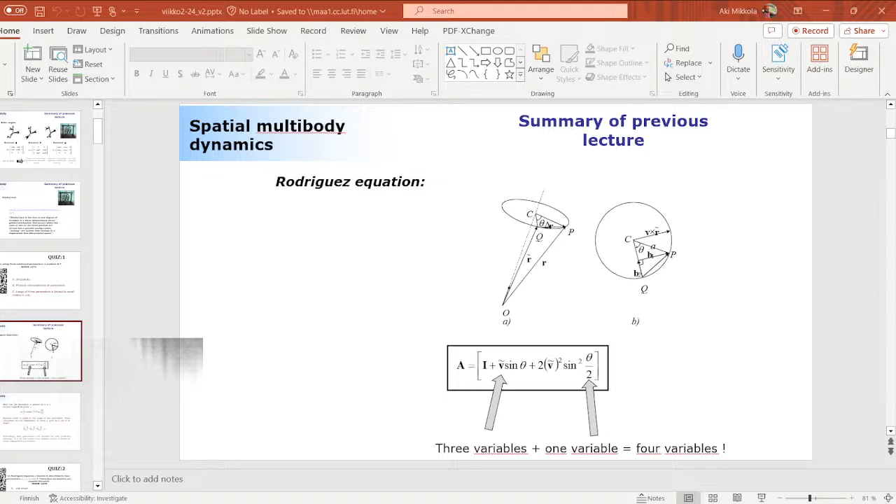How come? Maybe I capture the wrong thing, because I'm capturing this one. Should I capture window instead? Maybe capture the whole screen. Yeah, display like this. This will be a safe choice, I think. Okay, so now I still need to do this. By the way, how do other teachers do it when they're streaming? They don't use YouTube. The other one, the machine dynamics, it works fine. He just plugs it in.

This is Greg's course, is it? Greg's, machine dynamics. I'm really bad at names. You can ask him. He has a similar laptop as you have, and he just plugs in. Is he streaming via YouTube or something else? I believe he's just recording. I think he's also streaming, but I'm not sure. He's probably streaming via Teams or Zoom, which probably makes a lot of things easier. Yeah, of course. But I don't want to use Teams. It should, in theory, still be similar because you're still just streaming. Right. Yeah, but I don't want to use it because there is a reason for that.

It shouldn't be. But YouTube is always a bit more complicated. There are so many moving components, so sometimes it is a little bit painful. So let me take a look at the YouTube channel, how it looks at the moment. It would be nice if I could use another computer to see if there are any comments from online participants. It's just so many moving components. Simulation laboratory course. Okay.

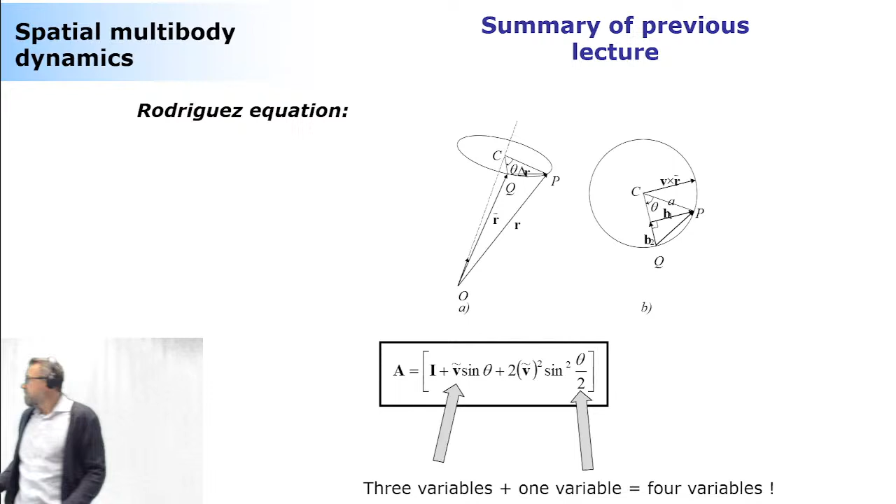And the constraint is coming from the fact that the vector v is unit in length. So when you compute the length of the vector v, that must be 1. And that's the constraint. So 4 parameters, but they have 3 degrees of freedom because of 1 constraint. And that's how it works. So when I compute the length of my vector v, it must be 1.

That's my constraint. This, by the way, is a funny thing, because when we made our first in-house code in multi-body system dynamics, at the very beginning we used Euler angles, and then after a while we started to use Euler parameters. And with Euler parameters, the one thing we forgot to do was to use this constraint. And it was a really weird simulation, because even the simple pendulum, a rigid body, was getting bigger and smaller, and we were like, what is this? Did we invent a new kind of dynamics?

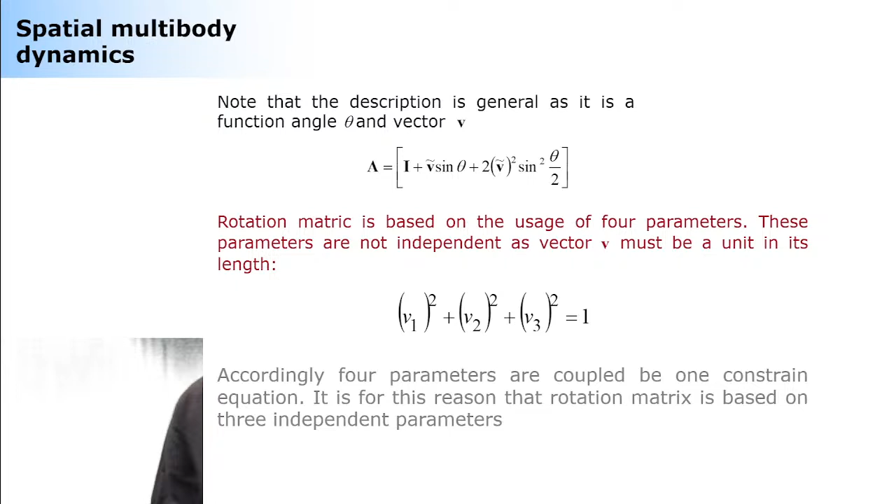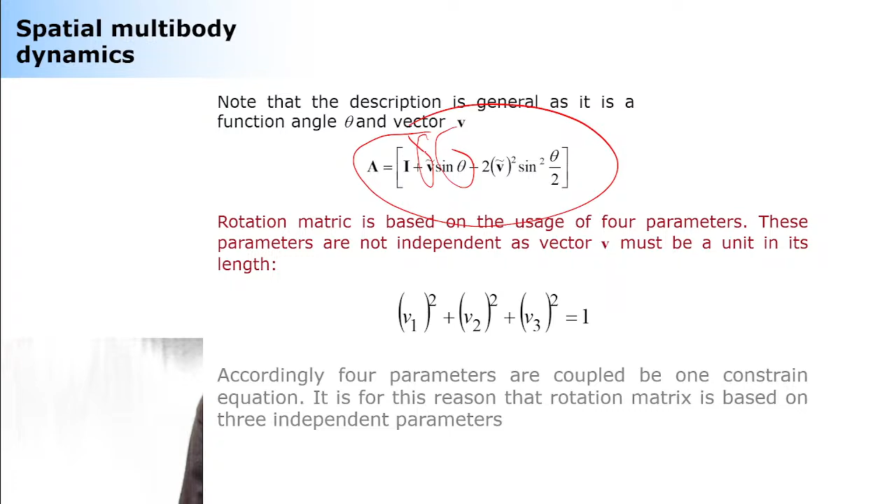No, we did not. But we forgot that there is this constraint. So the constraint needs to be added to the list of constraints. Otherwise, it's not going to work. It's not going to be possible to do any kind of computing. Okay, so here's the one that is up in my slide. This is your rotation matrix. And you know that it is now a function of vector v, expressed in skew symmetric form, and then the angle theta. That's my parameters, and then there's a fourth parameter.

Now, in the Rodriguez equation, rotation is described by 4 parameters, v1, v2, v3, and angle theta. These 4 parameters are coupled because: angle is small; the vector v is unit in length; we are assuming a body to be rigid; parameters are not coupled because a body can rotate in 4 different ways. Only one is correct. Okay, this is not as easy as what we started with in the beginning. So what do you think about the first success rate? Is it going to be 100%?

That's 100%. That's 100%. This one here is not going to be 100%, but it's going to be something quite high. I'm thinking like 85, 95, that neighborhood roughly. Still 90. Okay, so that's what you're thinking. So let's take a look.

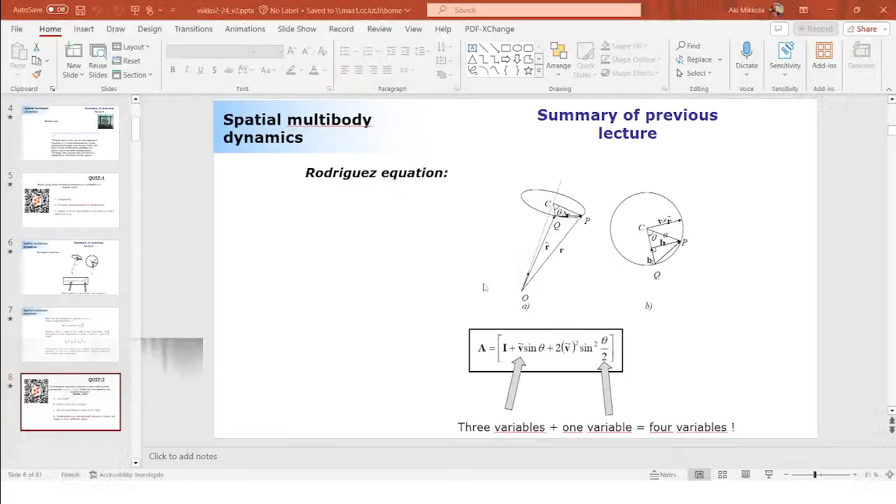Okay, you guys ready? Did you enter your answer already? Oh yeah, you cannot yet because I first need to show you this one here. This one? All right. No, if you go out of this presentation, it stops completely. Hold on. Why is that, because I thought that my in-class quiz is on. No, if you turn around, this presentation. Hold on. Okay, here. Yeah, sorry. You don't see this. Okay.

This is it. So we got 18 answers, which is, I think, a good number. But what's the success rate? Is it going to be 100? 95. No, don't say that. But I think it is going to be 100. I think it is 100. So we got more answers. And now this is never a good sign.

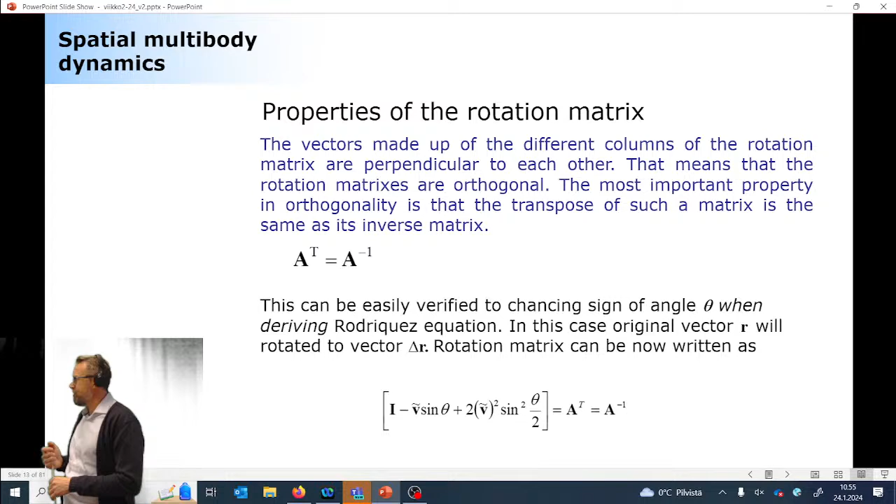Okay, properties of the rotation matrix. This is no surprise to us. They are orthogonal, and if you build the vectors out of the columns of the rotation matrix, they're unit in length. Orthogonal is a beautiful feature because then the transpose is equal to the matrix inverse. It means that you're changing the mapping order. Conventional is from the body reference coordinate system to the global coordinate system, but if you need to do it the other way around, from global to body, you do the transpose. That will change the order you do the mapping. And you can test it by doing the mathematical exercise at the very bottom of my slide. So that's how it works.

All right. You cannot change the order of rotation. That's very important in three-dimensional space. You can make an experiment yourself. You can say, okay, Euler angles, my first rotation is going to be 90 degrees, and the second rotation is 90 degrees. Then you change the order, and you will recognize that your body will have a different final configuration. So you cannot change the order of rotation. In the planar case, that makes no difference, because we only have one axis where the rotation can take place. But in three-dimensional space, you cannot change it, and that's something good to keep in mind.

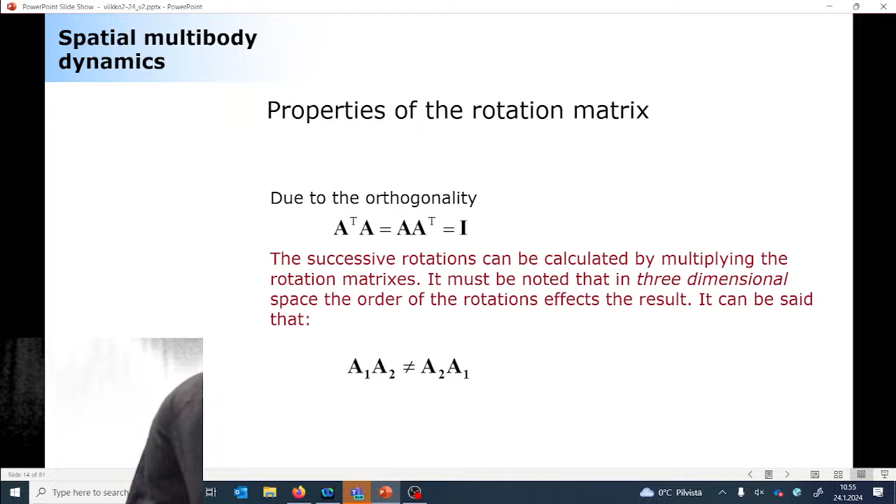Robot kinematics. This is something I promised to give a short introduction to. I don't think I will explain Denavit-Hartenberg, the most often used way to build the kinematics. I'm sure you'll learn about Denavit-Hartenberg. But I'm going to explain what this is based on. It's based on the kinematics we learned already, and how we can use this 4x4 matrix representation to build the kinematics as a big picture. And again, it's based on the same components that we have already learned.

So there's going to be the rotation matrix, and then this vector u bar and R matrix. We just reorganize them, put them all in a 4x4 transformation matrix, and that's the way we can build the kinematics. The beauty of this is that you can move from one coordinate system to another, and this is how you can build the kinematics automatically. Each coordinate mapping is described by a 4x4 transformation matrix, and you keep multiplying them, you can build more and more complicated kinematics automatically.

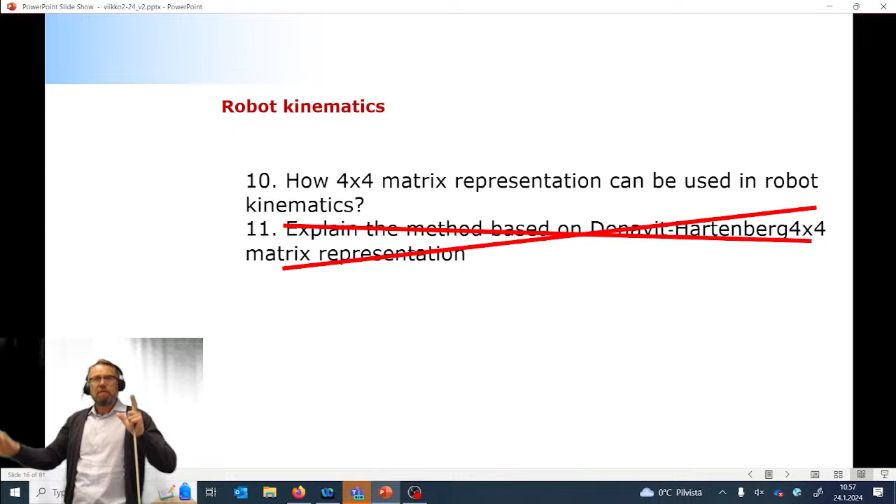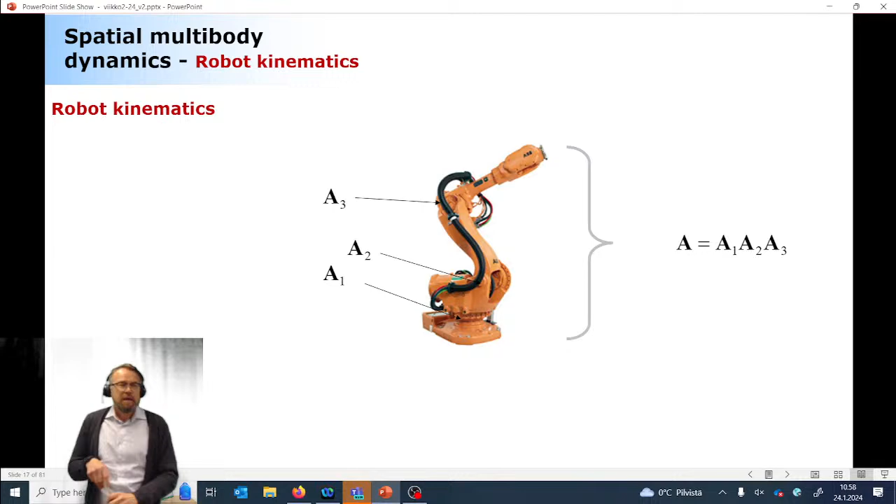All right, so it goes like this. First of all, successive rotations can be taken into account by multiplying rotation matrices. This is part of the answer, the way we can build the kinematics. But what is missing here is translation. This only accounts for the rotation of my final end effector, where there's a gripper or whatever the robot is meant to be doing. So you know its orientation, but you don't know its location with respect to the reference coordinate system. We can take this into account by modifying this representation, originally a 3x3 representation, to be a 4x4 representation. The additional component, of course, is going to be our translation. That's what I wanted to tell you about robot kinematics.

It's a different story than most of the kinematics we do in multi-body system dynamics, because what we know and what we want in robot kinematics is that we want the end of the robot, the tool of the robot, to be in a certain place and configuration. The big question is how to reach this configuration by using the robot coordinate system, or the angles between the different bodies of the robot.

So the kinematics is quite a bit different than in multi-body system dynamics, because we need to understand what is a translation and what is a rotation. And of course, two neighboring bodies in a robotic system don't have 6 degrees of freedom, they typically have 1 degree of freedom. Very often there's a rotational joint connecting the two neighboring bodies.

It could be a translational joint, it could be a combination of simple joints, but typically it's 1 degree of freedom, and we need to know what this degree of freedom is supposed to be to find the location where the end is located. So this is inverse kinematics. That's what it is called.

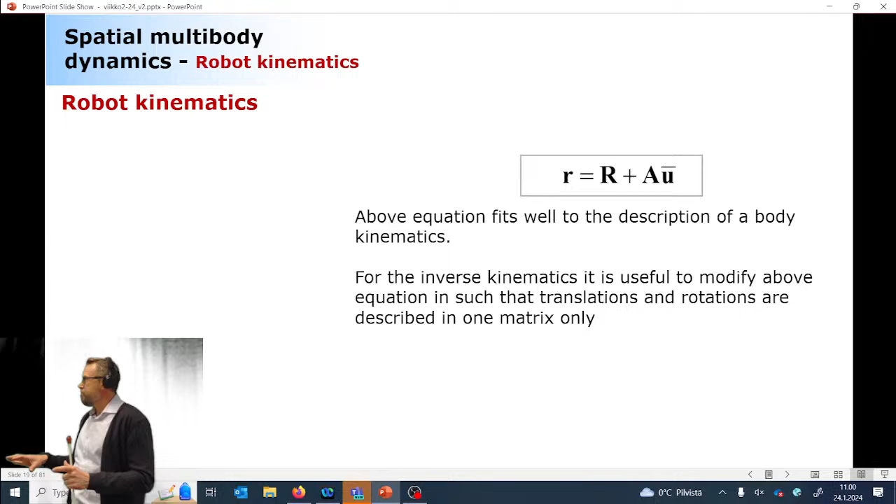Those are the components. What we're going to do is combine these two components, translation and rotation, into one matrix representation. It's a substitution game, nothing but a substitution game. Euler parameters was only a name game. This is a substitution game. So it's not very complicated at all.

You take your rotation matrix and locate it in the upper left corner of your 4x4 transformation matrix. Then you take your translational component and locate it in the upper right corner. The one thing left is to make it square in shape: you add one row. That row is fully occupied by zeros, except the diagonal component needs to be 1. This diagonal component is for some reason called the scaling number.

And I don't know any reason to scale the bodies other than not scaling them, meaning the number needs to be 1. But if you put this number to be 2, then whatever translation you do is scaled. Similarly, in the beginning when we made the multi-body in-house code based on Euler parameters, the bodies were getting smaller and bigger because this constraint was missing. Here, if this number is other than 1, it's going to do a similar kind of unnatural scaling. All right, so that's what it is.

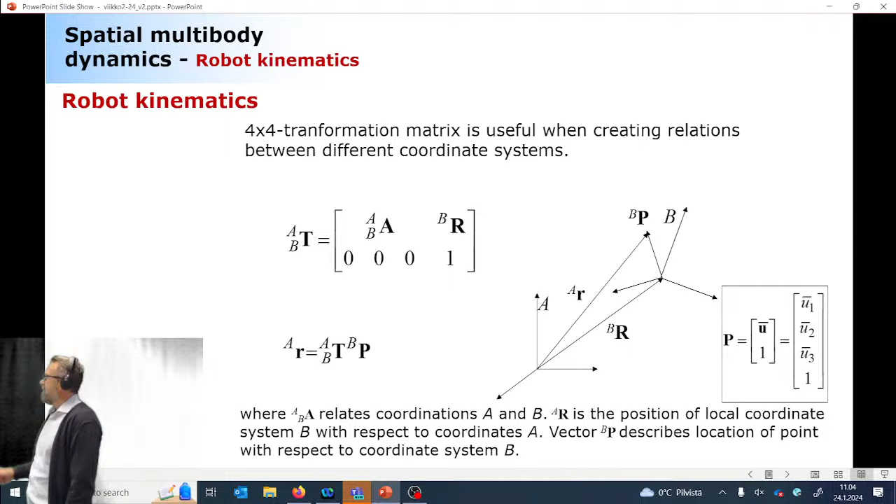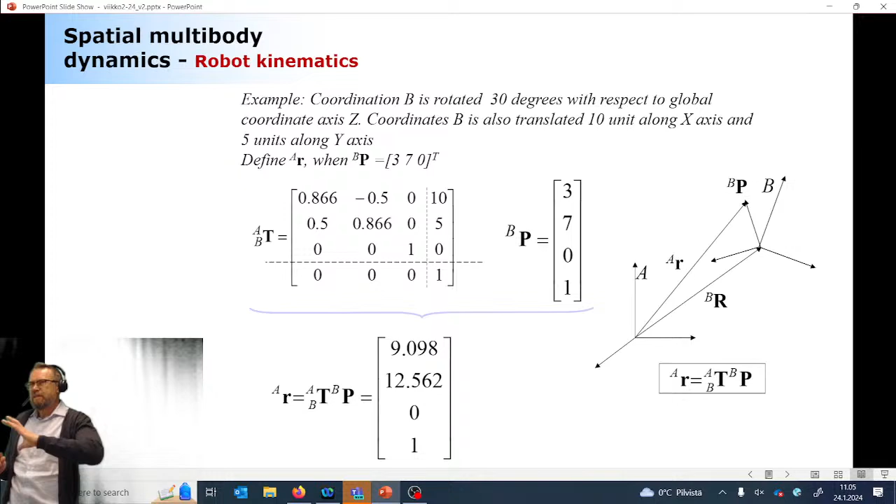And then I take this u-bar vector into account that was given in my assignment. When you do the math, it gives you exactly the same solution as using the conventional kinematics. But again, the beauty is that now you can simultaneously account for translation and rotation. Not handy as it is here, but it becomes handy when you have more coordinates, more bodies, because each of the robotic bodies has one reference coordinate system. That's what this is based on.

And now if you wanted to know where D, which is hypothetically our end effector, where the tool is located, what is its orientation and location? You can get it by building these transformation matrices between each of the coordinate systems, exactly like I did in this example. And then you don't give numerical values, but some of the values are parameters. Let's say if there's a revolute joint between this body and this body, then the revolute joint parameter is left open. And then by multiplying these matrices, you can know where this D coordinate system is located and what its orientation is. That's what the 4x4 matrix representation is about.

Okay. If you want, I have a few slides, and even a little bit of story in writing about this Denavit-Hartenberg. But Denavit-Hartenberg simply comes from the fact that these coordinate systems in robotics typically cannot move as they want, but they can have 1 or 2 degrees of freedom. Now, how you build this kinematics eventually is that you build a matrix or table representation of these parameters. And once you have these parameters, you do the substitution and everything will be ready. I'm going to show you a simple example next week, but very simple, because that's not the main focus of our course. Okay. Happy?

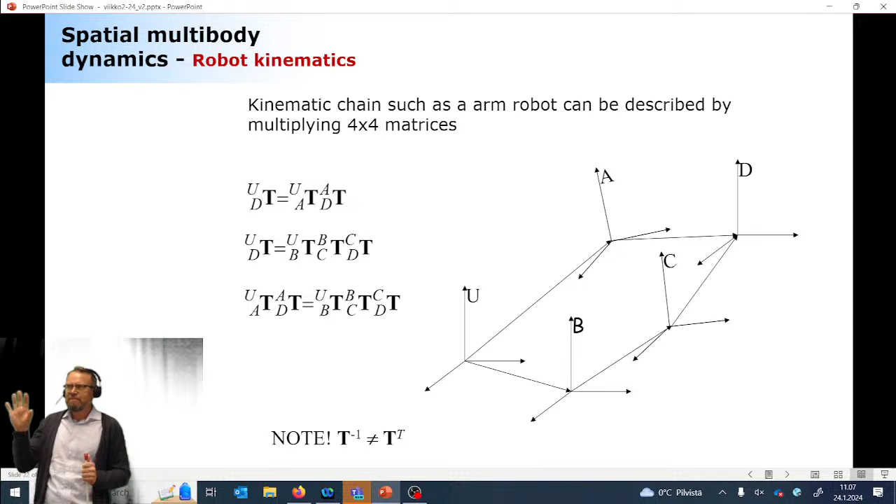Good. One more thing, and then we're going to move on to flexible multibody dynamics. This is the problem that I mentioned in 3-dimensional space. The problem is the fact that angular velocity is not the same as the time derivative of the rotational parameters. This is really confusing because in a planar case, they are exactly the same. If you have angle theta representing the rotation of the body and you differentiate it with respect to time, you get theta dot. Theta dot is exactly the same as angular velocity. No difference whatsoever. In 3-dimensional space, it's not.

And regardless how you do it, I mean that if you can find out the way to represent the rotations in a way that they are equal, then you just come to my office.

Of course, you're going to take over my office, and then we walk together to the rector's office. The rector is going to give you a professorship, just like that. Doctor's hat, of course, and then you continue, and I will go to do something else. So that's how it goes.

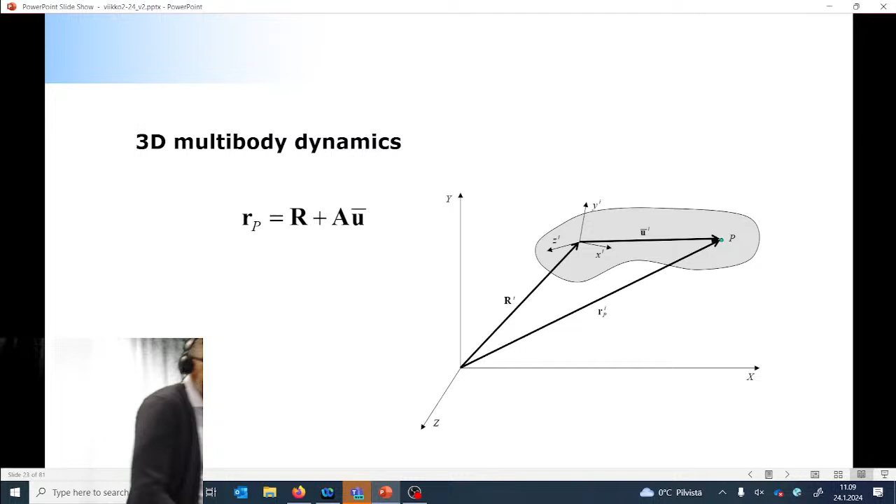So think about it. The next time you're walking home to your apartment, think about how you can do the rotations in a way that it's going to be exactly the same as angular velocities. It's not easy. Many people have tried. Maybe the most promising now is this Lie group. So maybe the Lie group will eventually do it. Okay.

It's related to everything then, of course, because when we're using these rotational parameters, the rotational parameters will be our unknowns. So everything will be expressed by using these rotational parameters. We have to build some kind of bridge between the physical representation of angular velocities and accelerations and the parameters. And this bridge comes very, very handy whenever you're modeling things.

Because when you do the modeling, components like the inertia tensor, which we're going to briefly take a look at, are easy to give in parameters that the human can understand, like the body reference coordinate system. If you give an inertia tensor using the body reference coordinate system, your life will be pleasant. Compared to that, giving your inertia tensor using 4 Euler parameters is going to be very, very hard, almost impossible.

But because the computing is based on 4 parameters, you need to build the bridge such that whatever way you want to express your parameters, it can be mapped to the ones that are unknowns in the computing. Okay, confusing. But let me explain this to you.

So let me see what are the comments. Okay, all right. Right, so we get started from this, and then I would like to take a short break after that.

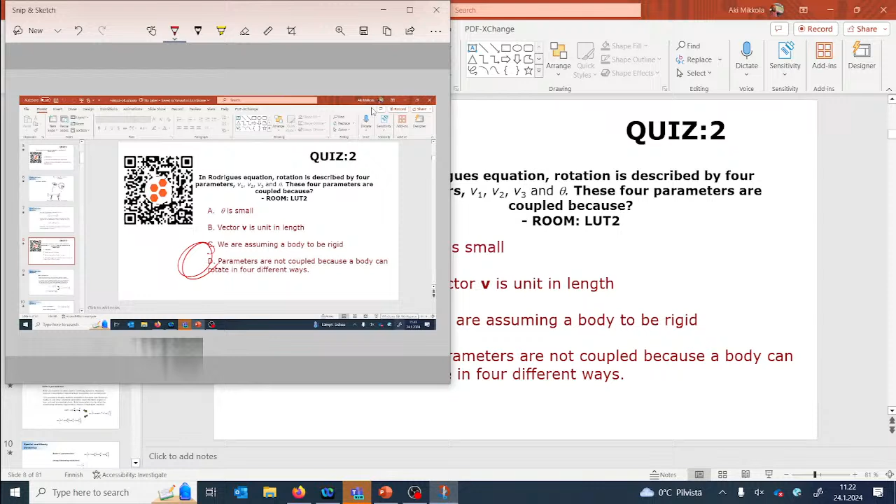No, that's not the way to go. It needs to be some kind of app. We can have a snippet of the whole screen where you can then draw on. You have whiteboard, but the whiteboard is also just empty space. Okay, is it this one? Yes, this is drawing, but it doesn't update with the thing you're constantly displaying. So can I write it here too? I can. You can see this. So if I do this. Probably then not anymore because you're not editing the slides anymore.

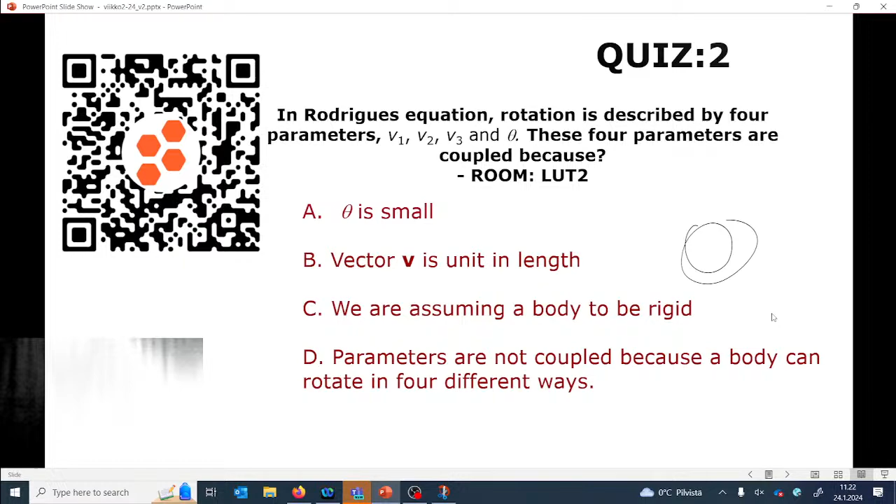Yeah, not anymore. What are the other modes of the slides you can have? Okay, so what should I select then? What are the options again? You have reading, the presentation. This one? The third one? Normal? The one with the 4 dots. So I should select the pen again? No, the other presentation mode, between reading and the normal one. Normal one. But if you press draw with touch.

Where can I see this? It's at the top in the section. Draw with touch. Okay, let me take the camera off. Okay, the camera is off. Can you show me? Sure. I need to try myself. I'm not sure there's any option. It would make life much more pleasant if we knew how to do this, because it's a bit annoying to go back and forth.

What is this option, for instance? It's slide sorter, ink replay, slideshow, slideshow timings. But this is slideshow, right? Present. I could maybe look it up at home. For now, we can do this. But there should be something. Yeah, that would be nice. Because I want to use this one, but I hate that I need to connect and disconnect this computer.

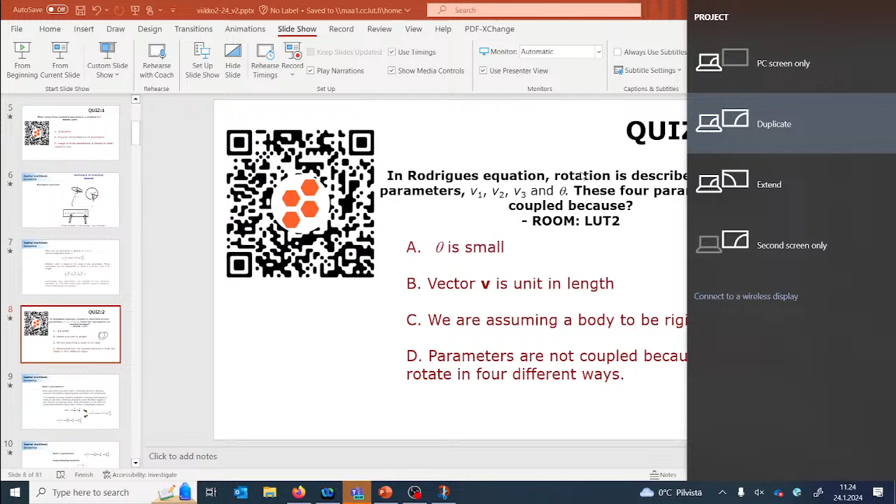What about this, if I somehow use... no, I shouldn't touch this. This is too high risk. You see, like the electromechanic. So Jussi knows how to do it. Yeah, he can control this stuff when it works. The other option would be simply hiding this and this. I don't know how to hide the slides. But you can at least hide the upper selection, here on the small arrow up. Yeah, so that makes it better already. I will ask Jussi.

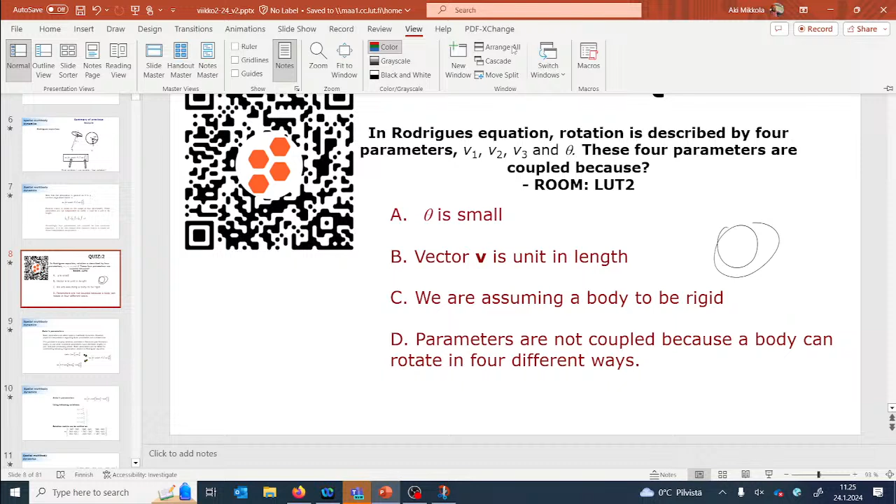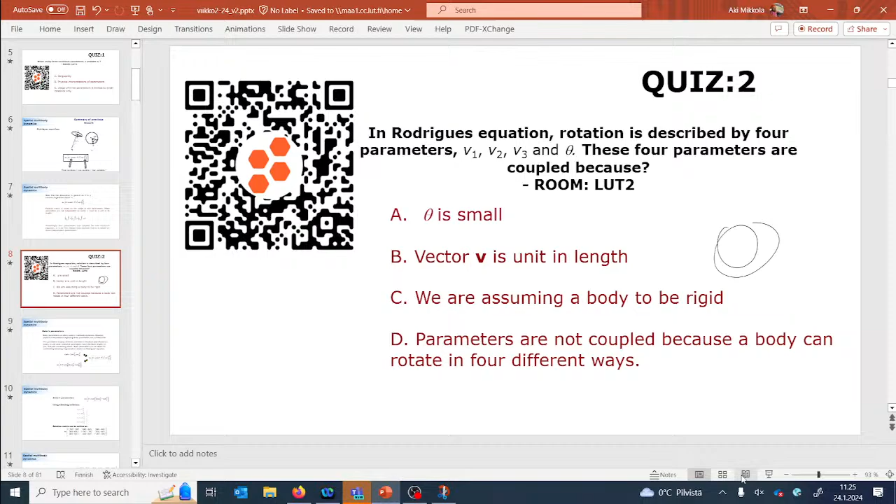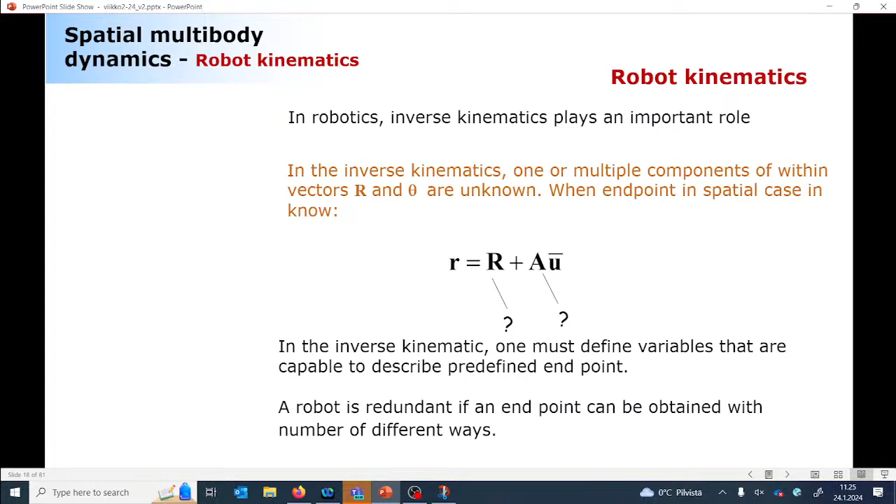So what should I do here? So I should put it in this mode? Yeah, right. And I was somewhere roughly in this area. Okay, so if we figure out this G, and the G is important.

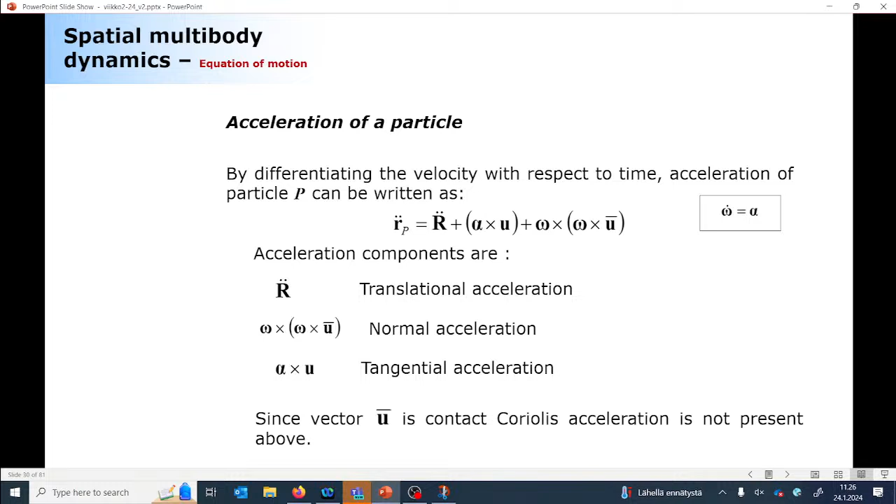Now the kinematics will be different. So everything will in future be based on G and generalized coordinates. This is what makes it possible to express the equation of motion. I'm going to just shortly explain how it is, because really what I would like you to be aware of is this G mapping. When you have this G mapping, you can use it in your accelerations, and your accelerations will look like this. And now that is looking really, really bad.

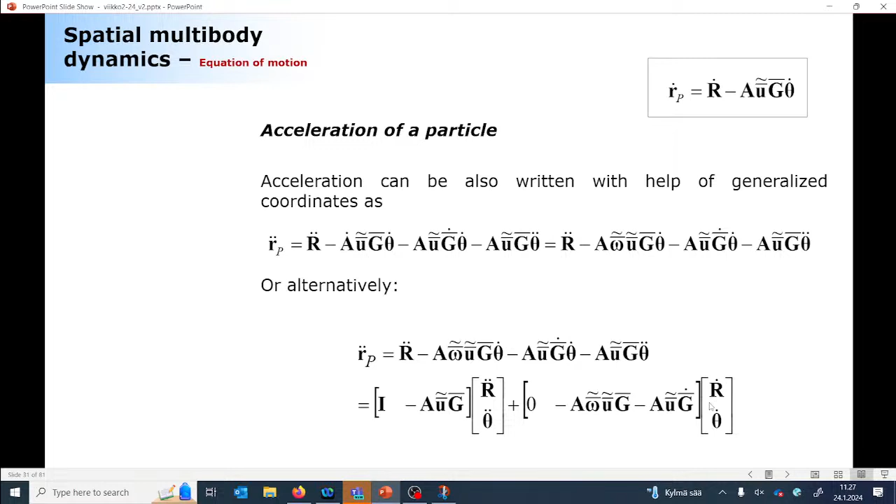But if you remember how we did in a planar case, we expressed the acceleration of generalized coordinates separately, and generalized velocity separately. This is something that's going to give you the mass matrix, and this is something that's going to give you the quadratic velocity vector. This is how the codes are made in multi-body system dynamics. And they are always based on this G, always G. And now this gives you the freedom to select these angular coordinates however you want.

You know your mass moment of inertia, your mass product of inertia. You can get it actually directly from any CAD software you want. And you can express that using the body reference coordinate system. And then in the real computing, you can move to any representation you want with help of G, because G is doing the mapping. So eventually, the mass matrix itself could consist of 7 times 7 components.

If you directly get started with the 7 times 7, you will be lost. I can guarantee you that. It's going to be so difficult to express inertia properties using these Euler parameters that no one can do it correctly. But now because of the mapping, it becomes possible.

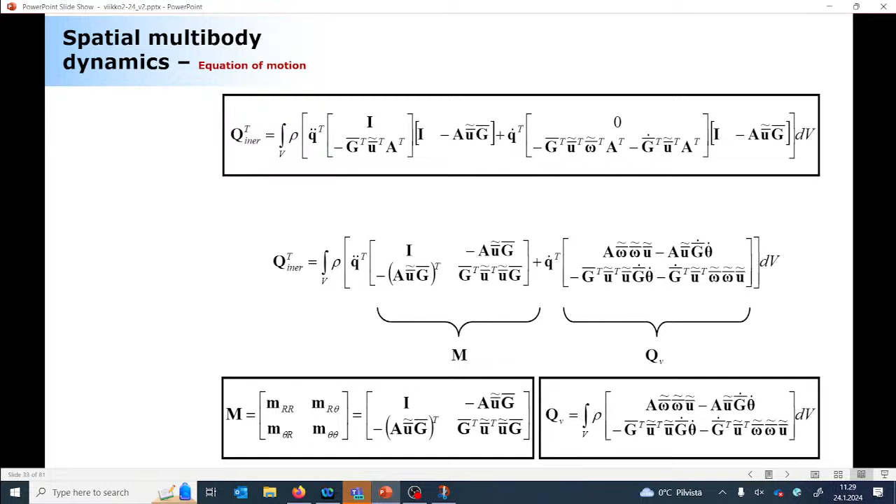I think I'd get 0 students in my class if I say, here we're going to create the entire code in three-dimensional space using these G matrices and stuff. It's going to be too hard, I believe. A little bit too hard. Okay, so that's the story about the three-dimensional space.

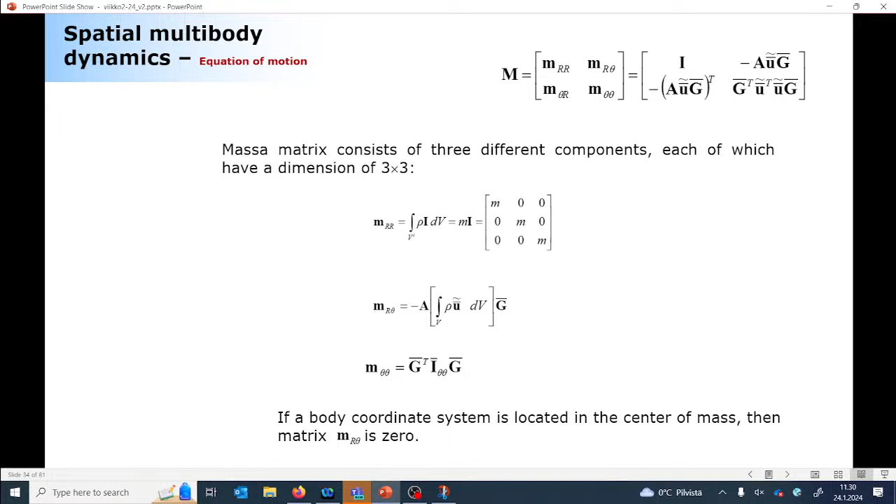Inertia tensor, of course, this is how the mass matrix looks. You have this mass, which is this identity matrix, so mass in three different directions. Then the one that is connecting the translation and rotation. And what is left in this lower right corner is your inertia tensor multiplied by the G matrix. That's how it works. The inertia tensor consists of mass moment of inertia and mass product of inertia.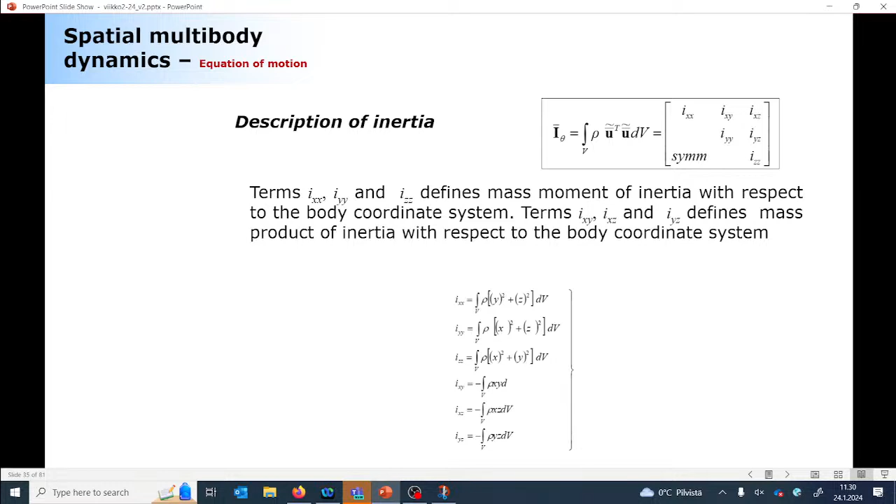Mass moment of inertia always has positive values. The problem with the mass product of inertia is that it can be minus or plus, depending on how you set your coordinate system. So it's a little bit hard to deal with. But again, please use your CAD software to do the computing. And the equation of motion eventually looks no different.

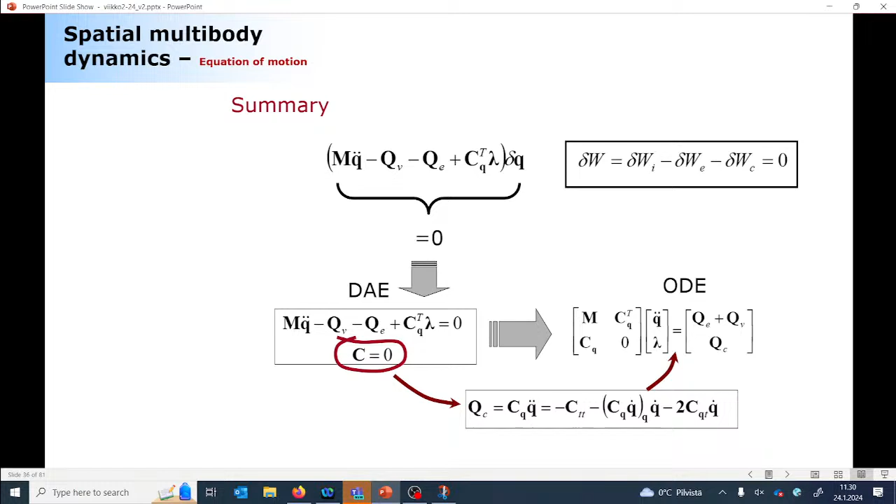Okay, flexible bodies. Let me get started from this. Like I say, I wanted to explain a method that is extremely important in engineering, and that method is the finite element method, which you may already be familiar with. I don't care, because I want you to understand the true nature of the finite element method. Very often, the finite element method is misunderstood, because the easy way to understand it is using the spring analogy, explaining that there are two points connected together via springs. And the finite element method is not at all about that.

Sometimes you hear these stories that you have these two points. Like I'm speaking about beam elements representing this structure here. You have a node here, and a node here, and what is between is empty space. The finite element method is all about the space between the nodes. It's all about the space. It gets started by making an assumption about the space, this area between the nodes. Everything is based on that.

So really the finite element method is how we describe something that is between these points, called nodes. That's what I would like you to understand, because when you're using commercial software, you're definitely not going to understand this concept. And if you're learning the finite element method using the spring stories, same stuff. It's not about the springs, it's all about how you describe the space between the points. And it's described using polynomials. Are you aware of this already or not yet? Not yet. Okay. But it can be described by other means as well, not necessarily polynomials.

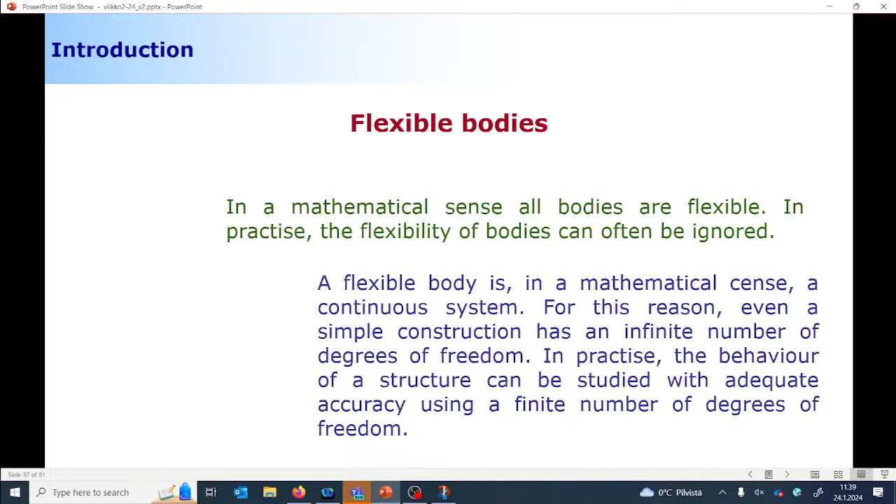So sometimes it improves the accuracy quite a bit. Sometimes it's needed because of the strain history. But generally speaking, there is no rule to know when the body should be modeled as flexible and when it is okay to model it as rigid. So you can develop a method of your own. You can look at a structure like this and say, yes, you need to model it as a flexible body. And then you can ask a consulting fee of thousands of euros because of that decision. But again, there's no real way to find out when it makes sense to model flexible bodies.

Okay, then I have one more in-class quiz. When does body deformation need to be accounted for in multibody applications? The options are: when a large force is applied to the system; when the natural frequency of the body is low. By the way, we're going to discuss natural frequencies too, which takes you close to vibration analysis. Then, slender structures, where thin structures are in consideration. Or there is no general rule to make this decision. So which one is correct? And after this, we're going to move on to career counseling.

So let me check here. 96, really, really good. Not 100, of course, but 96. 86. Yeah, but that's good too. That is good too.

Okay, then the last one: when you can make this decision. And like I say, then we have to get started with the finite element method, because we need to do this discretization, and how you describe the space between these two points called nodes. There could be more than two points, depending on the type of element you're dealing with; it can be something completely different. So that's what we're going to discuss a week from now.

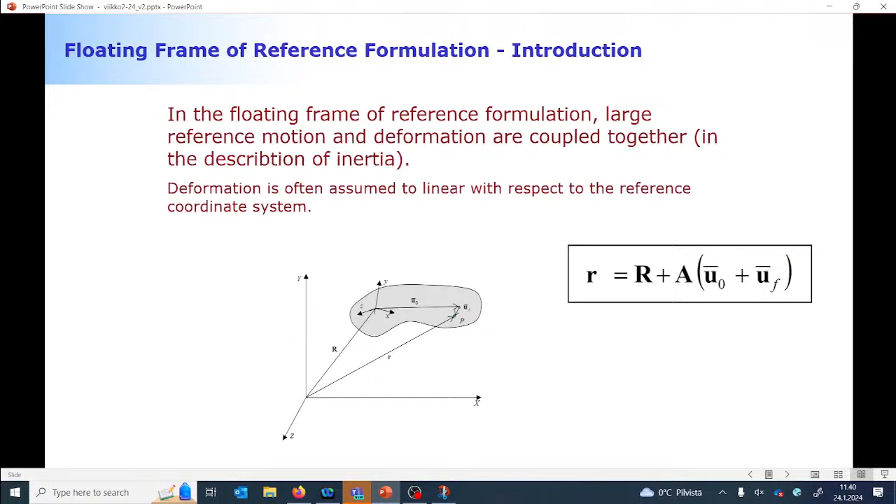Okay, and then I'm going to rush myself. I know there's a lengthy story. Here. Career counseling. Not that. It worked actually. Really? Just click on presentation. Yeah, but the online participants see it in an incorrect way, so that's the problem. Try it. If it really works for us, maybe it works for them too. So it looks good to you, but online participants see it like this, so they don't see it as well. Maybe there's something I can select here. The problem is that it wants, for some reason, the presentation mode. Oh, no. Absolutely not that. Okay, so it's going to be like this.